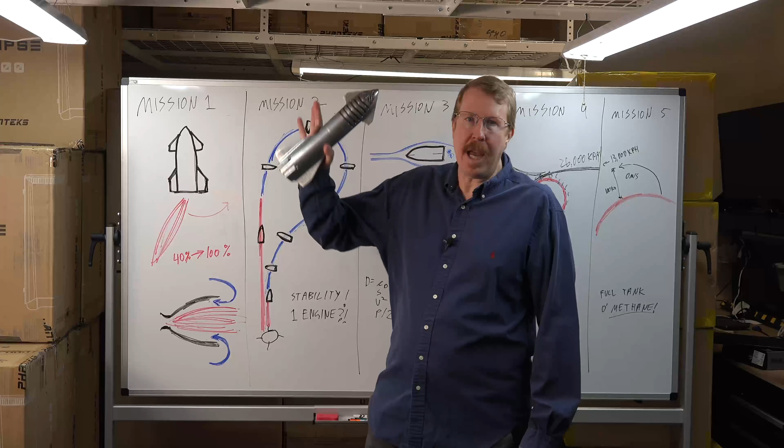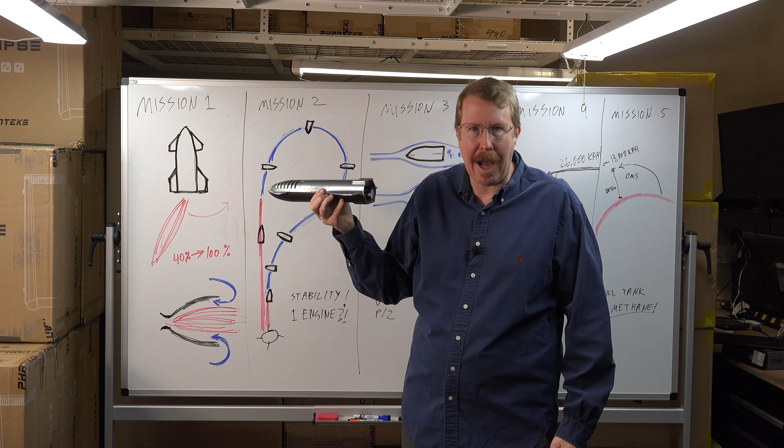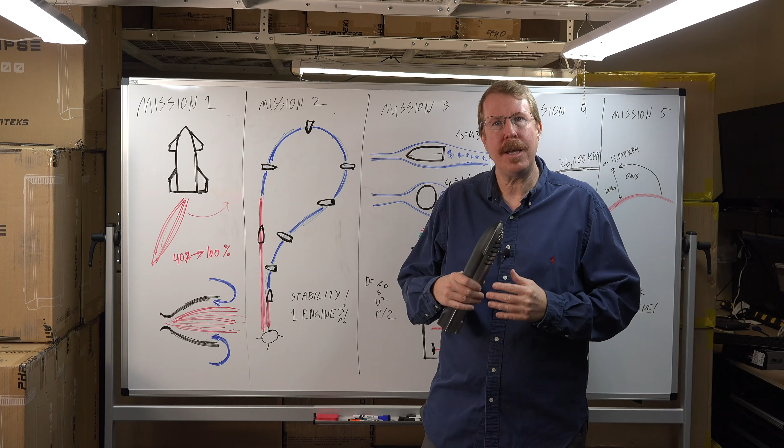So, like many of you, I recently heard about this insane flight that SpaceX was about to fly in Texas, where they would start off on a launch pad in a rocket with a bit of fuel, blast up to like 50,000 feet, fall down like a skydiver, and then hit landing engines at just the last moment and land. As soon as I heard about this, I was like, I have got to try this in X-Plane. Because remember what X-Plane is for - it applies actual aeronautical formula to physical bodies to predict what they're going to do next in the atmosphere. It's a completely objective analysis of what an airplane is going to do. And because of that, it lets you fly a mission in the sim before it's flown in reality. That's what X-Plane is built for, right?

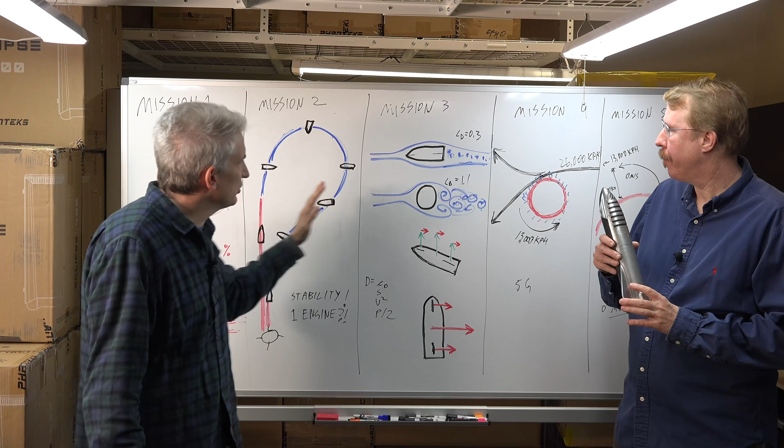Hold on, Austin. I have to interrupt here. So I have used this app, and it occurs to me that what you've done is you've taken going to Mars, which is a multi-step process. It's not like you just blast off, you fly to Mars, you land - it's a multi-step process. And you've divided it into 5 different missions, which ultimately, if you can fly all 5 of these missions, you could fly yourself to Mars. Now, we know the computers are going to control a lot of this, but what's the fun in that, right? It's fun if you get to do it. Of course. But you've taken the aerospace engineering and put it in, and you've essentially proven that what Elon is trying to do with SpaceX is doable.

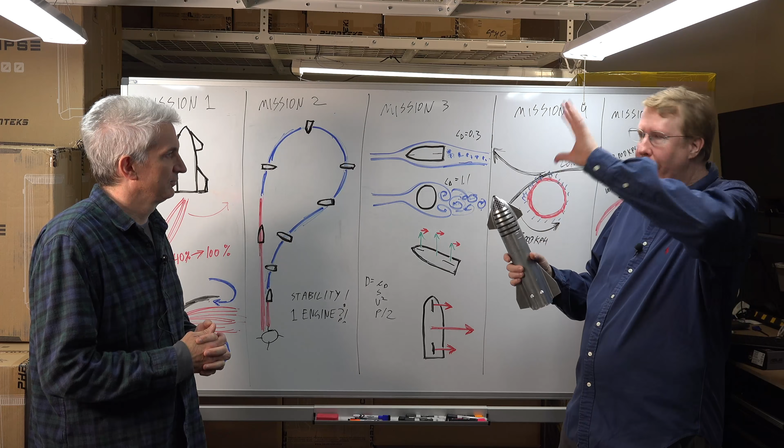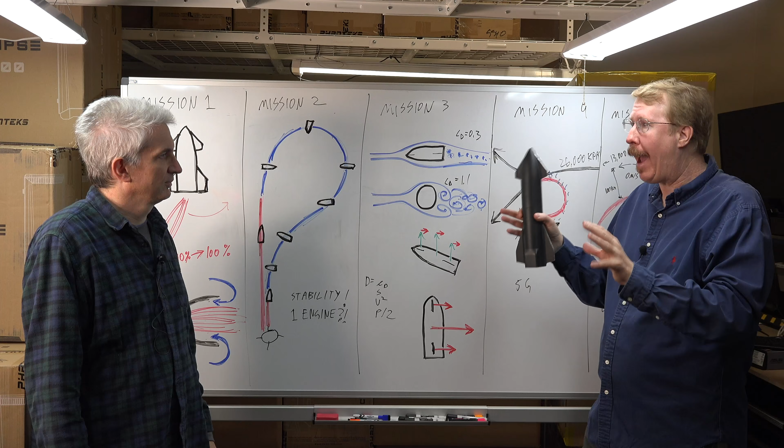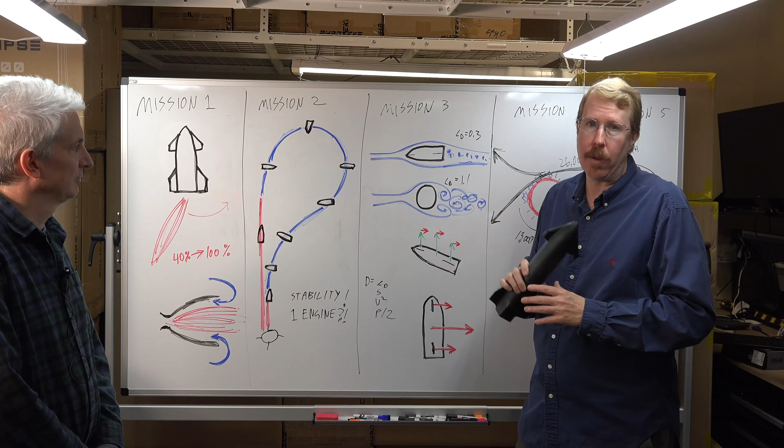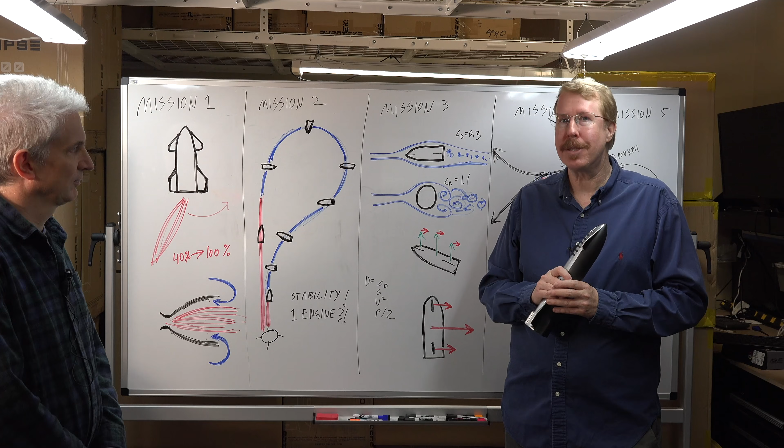So what I want to talk about today is an app I wrote called X-Plane Starship. It's available on the iPad, and it's going to let you fly all of these SpaceX missions yourself. By the time you've flown all 5 missions, you'll have a pretty good idea of what it's like to operate a SpaceX Starship. And if you can succeed in each of these missions using the real physics that X-Plane has, you'll have also proven whether the real mission to Mars that SpaceX is proposing is at least theoretically possible. Because a lot of this, from here forward, is just an idea - this is the only part that's been done. We've only flown, SpaceX has only actually flown mission number 1. All the other missions exist only hypothetically. And as we're recording this video, they're still fueling up the rockets and testing the engines for mission number 2. But you can fly it right now, before they do it, right now in the simulator.

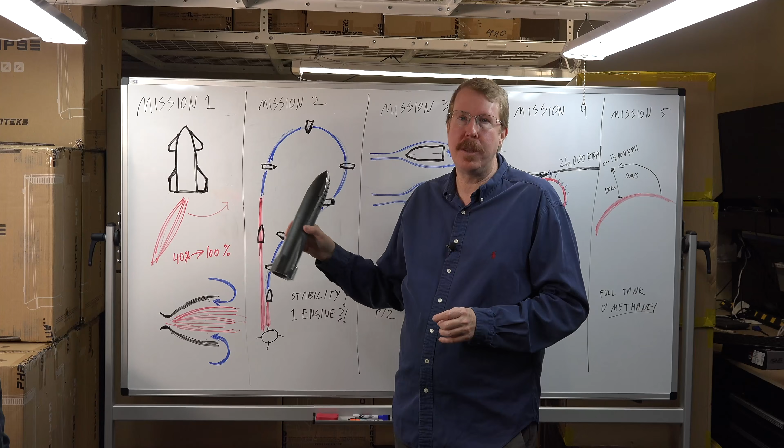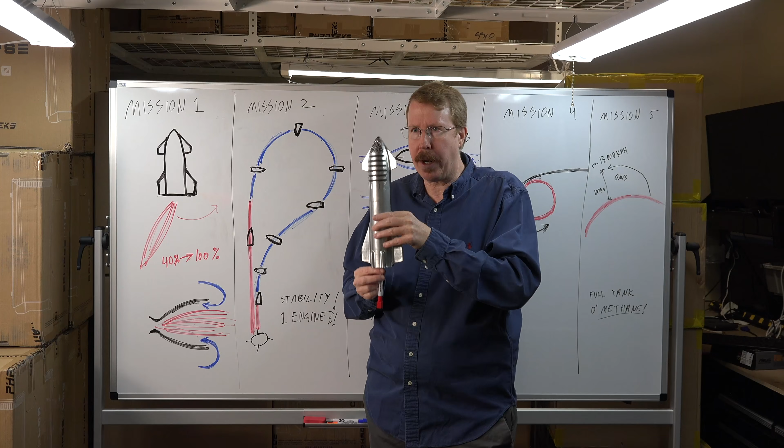So it's called X-Plane Starship. It's on the App Store, iOS App Store. It's free. And I guess what we're going to do is I'm going to walk you through each mission one at a time, and we're going to start with mission number 1. This is a recreation of a flight that SpaceX has already actually flown in this airplane. And the way it worked is they took off from a takeoff pad, translated over a bit, and then landed. How does this airplane steer itself when it's got the main engines running and hover? Well, the engine is mounted on a gimbal, and it vectors the thrust. So the gimbal vectors the thrust to move the airplane like this.

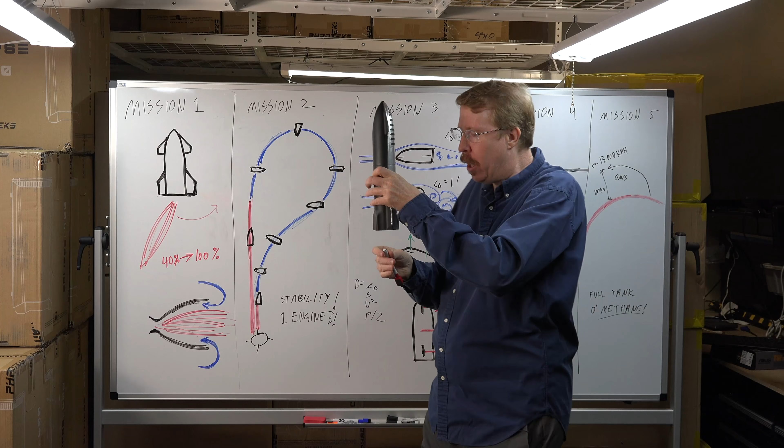It's not exactly like a seal balancing a broom on its nose, but it's kind of similar in that the thrust moves one way and the rocket initially moves the opposite way before taking off. So when you're flying mission number 1, as you tilt the iPad to tilt the rocket away from you, back towards you, or left or right, you're driving that thrust vector to maneuver the rocket.

So Mike, you flew this mission. How did you do with it? I did okay. It took me a couple of tries to get it right, and I kind of went around in a circle a couple of times. Yeah, the hard part is anticipating in advance enough to not find yourself always chasing around in a circle. No question, that's the hard part. That's exactly what I did.

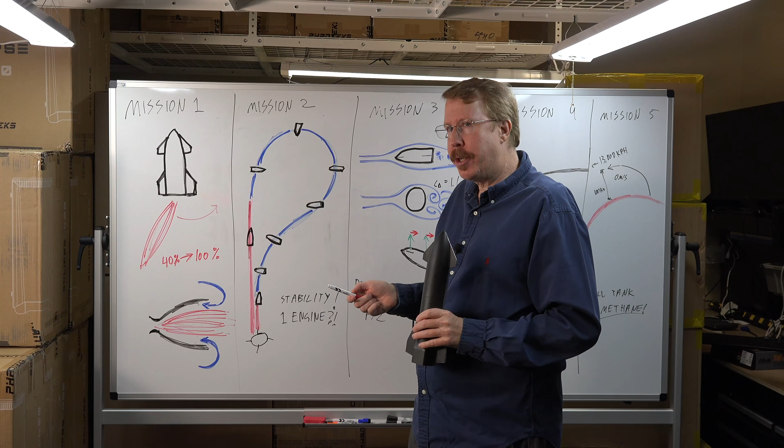Okay, so did you notice how many engines were running for this test? Looked like one to me. Yeah, exactly. There's 3 sea level engines and 3 vacuum engines in this rocket. It's a 6-engine rocket, but it only hovers with 1 engine. Do you know why that is?

Well, the obvious answer is because that's all it needs. Sure, but there's a more technical answer, I'm sure. Yeah, and here it is: the engines on this thing can only be throttled between 40% and 100%.

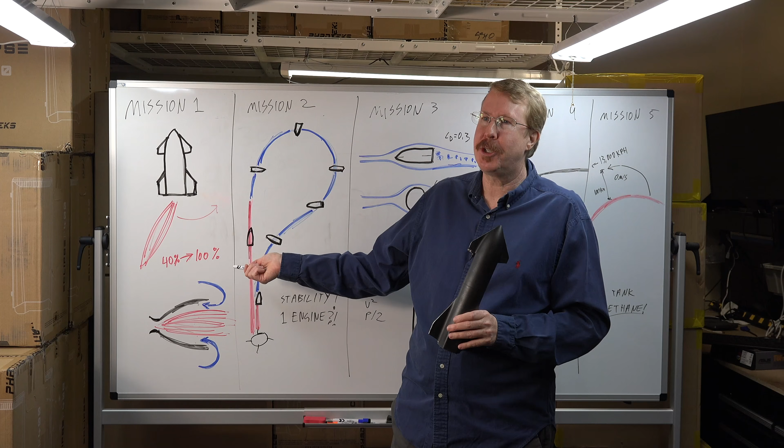Now, you obviously drive your ridiculous Dodge Demon Hellcat Viper. What is your car called again? Hellcat Red Eye. And what would happen with your Hellcat Red Eye if every time you put that thing into gear, you had to be between 40% and 100% throttle? How would that go for you? I wouldn't last very long. No, you wouldn't last through your first drive.

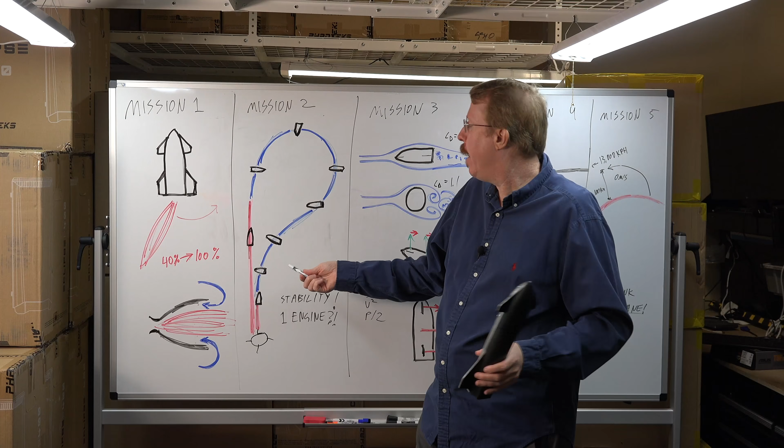These rocket engines are kind of the same. They run 500,000 pounds of thrust, and they can only throttle between 40 and 100%. So if you put too many engines on this thing, it ain't going to hover, because 40% is your minimum throttle — up you'll go. So this thing hovers with only 1 out of 3 engines running.

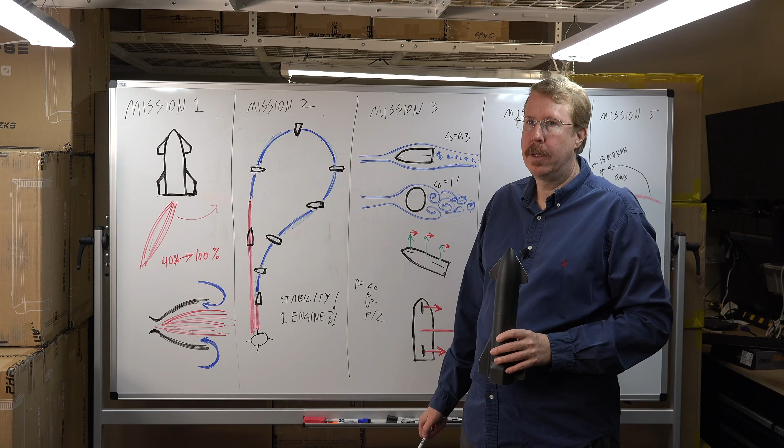Now, let's talk about why. Do you remember why exactly you cannot go below 40% throttle? What happens? Well, from your previous takes, I happen to know that if you run it below 40%, air, sort of like those blue arrows, gets into the nozzle and causes it to be ineffective.

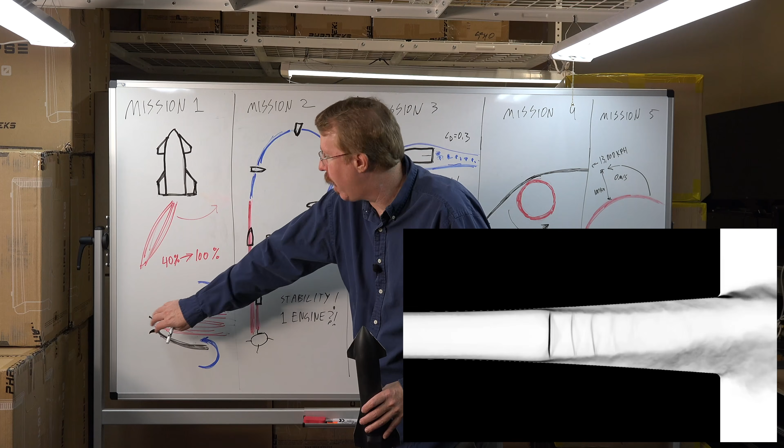Right, exactly. So what happens is the way flow works in a nozzle is it's supersonic. As the nozzle expands out, the air goes faster and goes to lower pressure. If pressure comes down too much, air from the atmosphere starts leaking in and destabilizing the flow around the exit. So you have to keep this nozzle filled with expanding fuel at a certain rate to keep that air from leaking in. 40% of maximum is the minimum you can dump into the system without air leaking in from behind.

So this thing hovers at 70% throttle, which is perfect to let you take off, translate over, and land on the destination pad. Okay, now let's talk mission number 2.

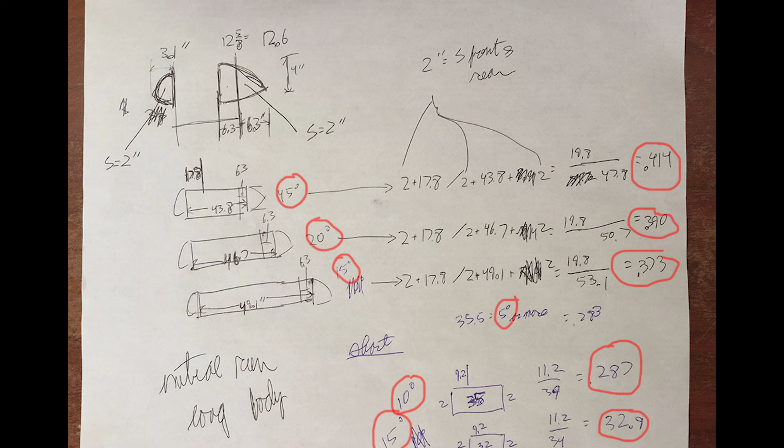So Mike, you remember like a year ago, I had a cylinder out of the roof of my wife's Tesla going down the street and measuring the aerodynamic center of the cylinder. Do you remember what I found about where the center of pressure lies on a cylinder?

Well, the center of pressure, I think, was in the middle of the thing. No. Wasn't in the middle? When you're running this way, going straight into the air, the center of pressure is 25% of the way back from the leading edge. And it caused it to spin around, which caused it to spin around.

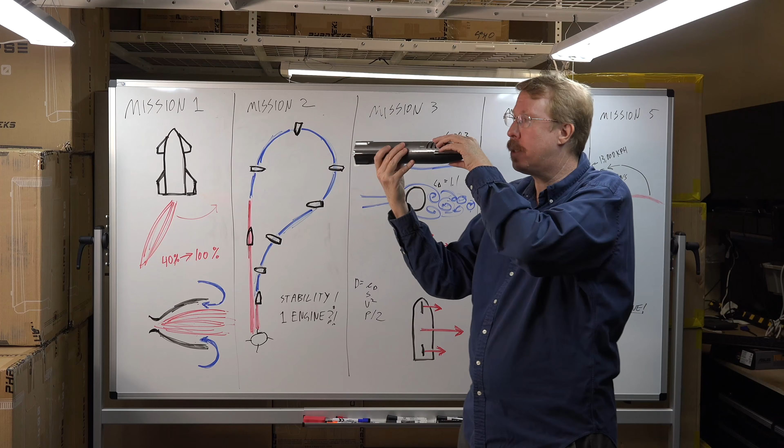So let's say we're going this way — the center of pressure is at 25% of the body length back, which causes it to spin like this. Now, as we're going this way with the center of gravity in the middle of the airplane, what happens next? Well, the center of pressure is now towards the back, and it's going to spin back around again, which is spin back around.

And then where is it going to wind up in equilibrium? Well, eventually sideways. Exactly, eventually sideways. So in other words, the center of pressure is always at roughly 25% of the body length, which will spin the nose back — it has the center of pressure there, which wants to spin it back, and it eventually just winds up at a 90-degree angle.

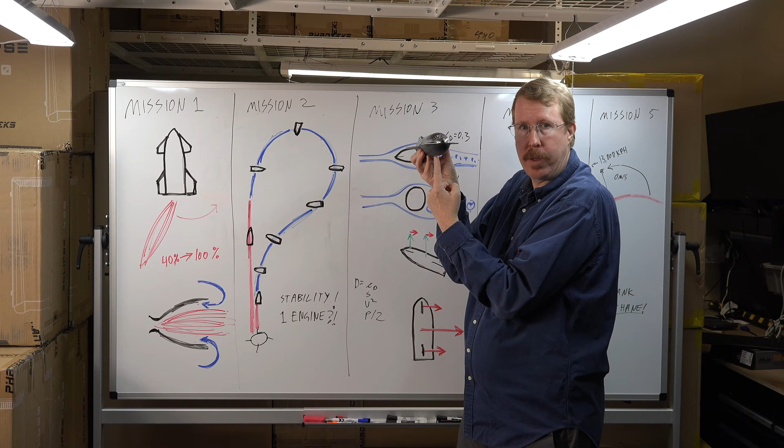If the center of gravity is at the center of the vehicle, or the test flight where it's connected to a spinning rod, it's going to wind up stable at a 90-degree angle. Because that's where the center of pressure and the center of gravity are the same point. So it's going to wind up wanting to move through the air like this.

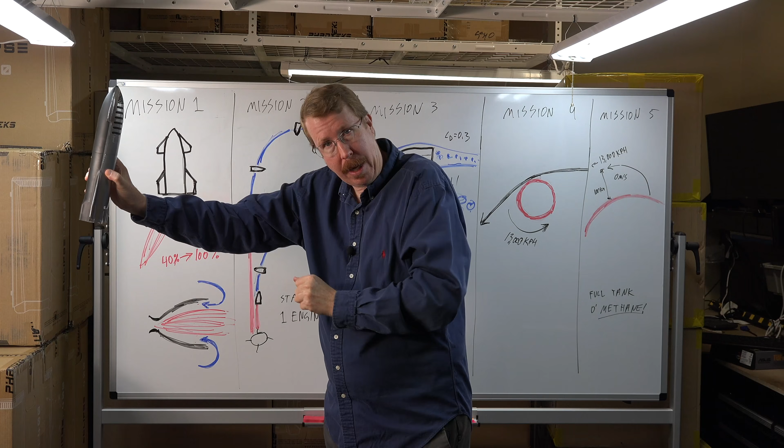Now, if we put some little fins on here with a 45-degree dihedral coming up like this, it's going to want to wind up in this attitude as it moves, because it's acting like a shuttlecock. You know how a badminton shuttlecock always wants to have the fins trailing behind it? Same thing here with a 45-degree dihedral. So this is the natural attitude the vehicle wants to take if it's going in this direction.

Now, let's talk about mission number 2, the crazy test flight that's about to happen in Texas. We start off on the pad, engage the engines, and up we go.

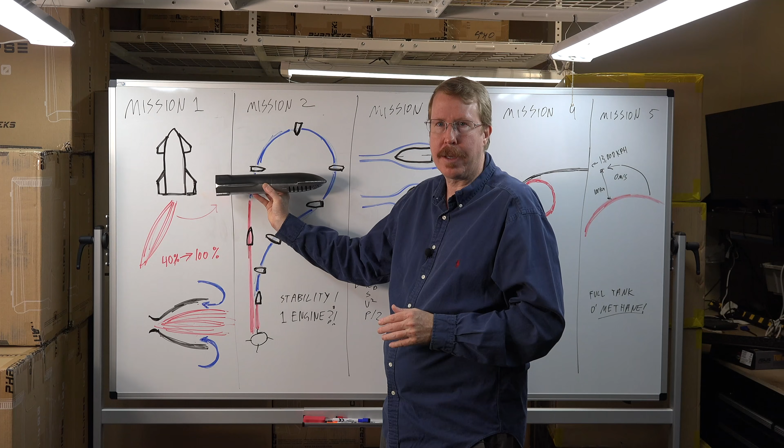Now, here's my first question for you. Why doesn't it put its belly to the airflow immediately and go to a 90-degree angle of attack during the launch? Well, I would assume the computers on board are ensuring it stays straight by using vector thrust. Exactly. So as you're going up, that thrust is constantly making tiny corrections you can't even see to hold the nose pointed straight up, because it's not naturally what the rocket wants to do.

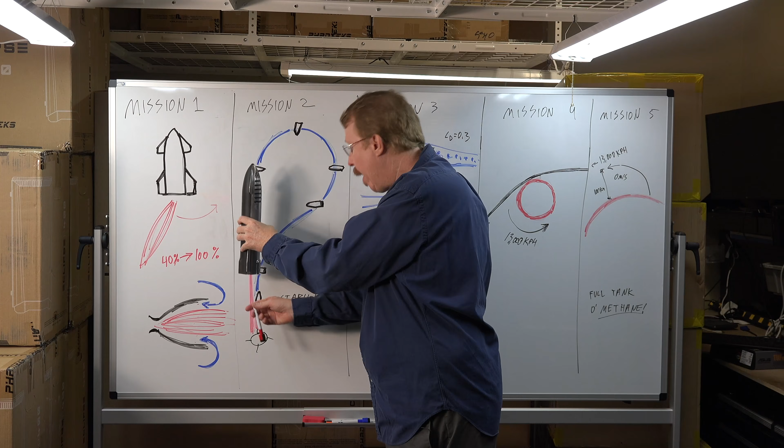Then, when the rocket engines shut down and the thing is still moving upwards, what's the rocket going to do next? Well, it's going to start to take a natural tendency to roll over. Exactly. It's going to go belly up like this because it wants to go belly into the air naturally.

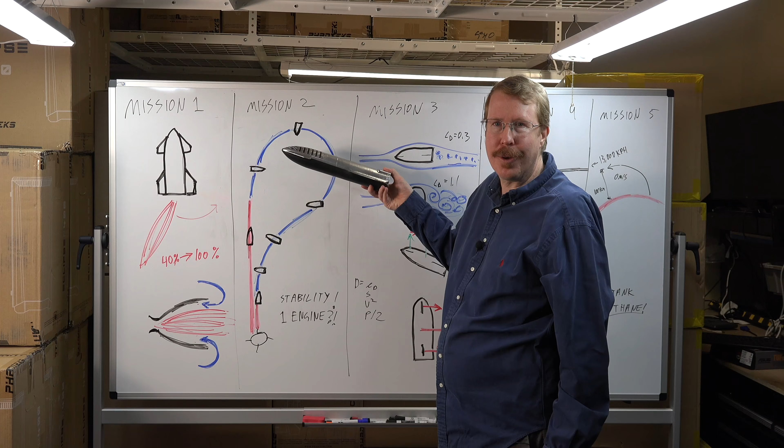Once that happens, it's going to peak out around 40 or 50,000 feet, and it's going to start to come down, and it's going to naturally want to assume the attitude of a skydiver. And at some point, you're going to start descending in a level attitude, and you're going to realize what you need to do is get back over to your landing pad.

If you want to lower the nose, fold up the wings in front, and the nose will come down. If you want to lower the tail, fold up the wings in back, the tail will come down. Same for roll and for yaw. You can always just move your wings in one direction or another to maneuver the craft. And at this point, you're not in a rocket so much as an airplane. You can actually glide like this back towards your launch pad like an airplane.

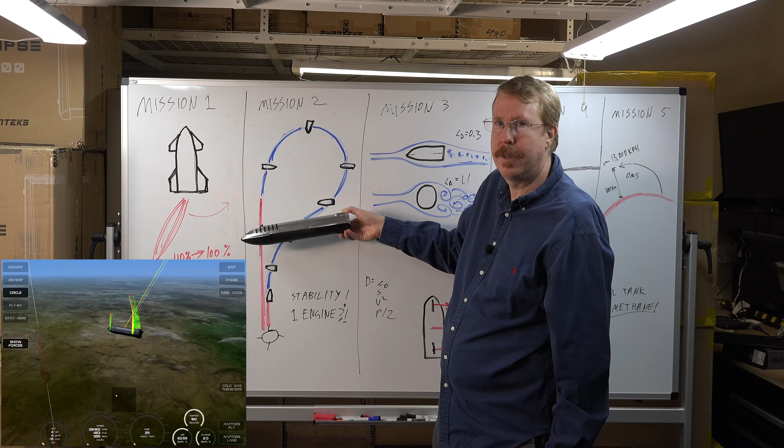And then what should you do as you start getting close to your takeoff point? Well, you want to raise the nose. Right, exactly. And pull back so you can almost try to stall yourself, essentially. Yeah, it'll feel like a stall in an airplane. Tilt the pad back towards you, raise that nose. Actually, you are going to stall the wings. I mean, you're going to a 90 degree, you are stalled. Yeah. So get the thing stalled, and then it's going to come down vertically.

And then when you're just above the ground, what do you do? Engage your landing engine. Engage the landing raptors. And there we go, and it'll tail sit.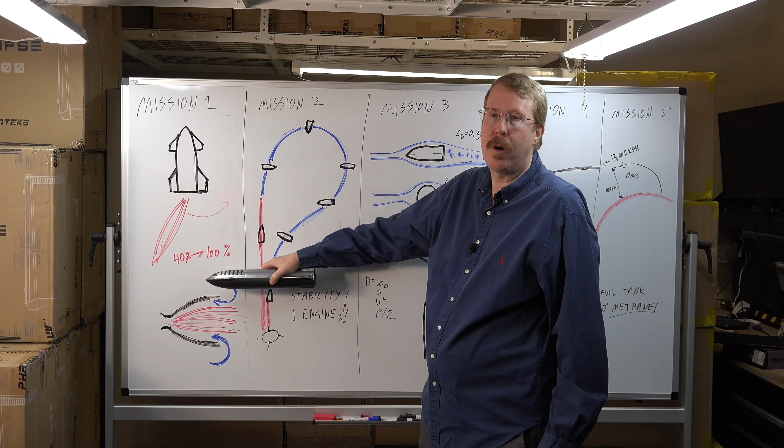Now, why do we let it get as low and slow as we possibly can before we engage those landing raptors? Well, the air is thicker lower. Also, the lower it is, the less the engines have to run. And the slower you're going, the less the engines have to run. Right, the goal is to have the engines run as little as possible for the landing, to use the smallest possible amount of fuel. Therefore, you want to go as low and slow as you can with air.

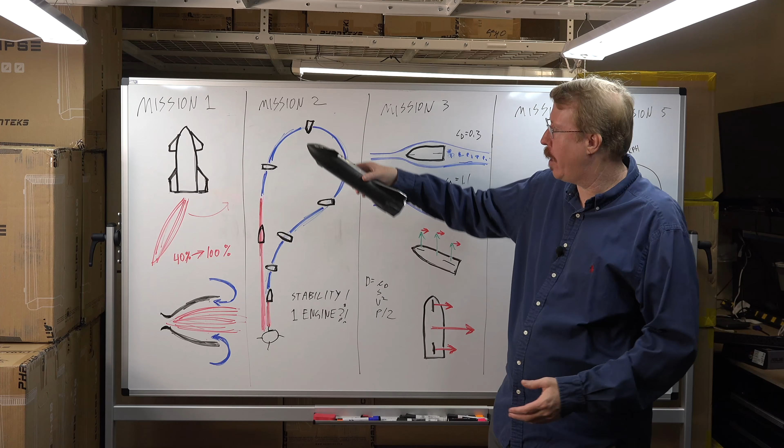The way to go as low and slow as you can with air is to maximize the drag and descend to the lowest possible altitude. And so that's exactly what it does. It's the equivalent of a skydiver waiting to the last minute to throw his chute. Right, because let's say he wanted to use his parachute for the smallest possible amount of time. Right, we want to run the engines on this for the smallest possible amount of time.

Parachute's only good for 30 seconds. Yeah, if you've only got 30 seconds of parachute, you have to wait until the last second to pull the cord. That's exactly it. Imagine your parachute only works for 30 seconds.

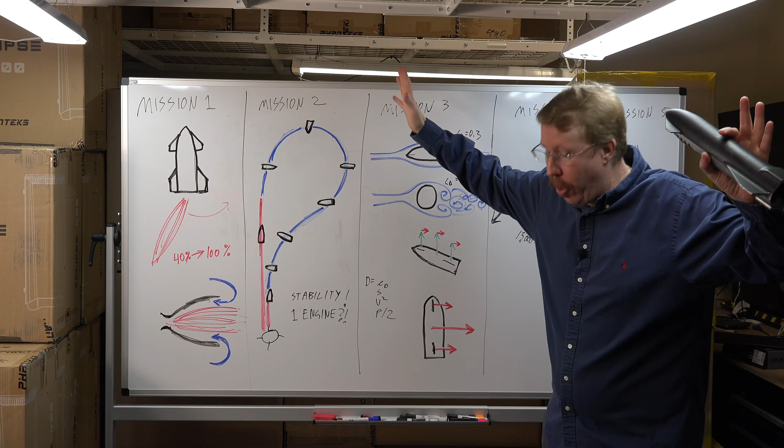You wait until you're low. And if you're smart, you're going to slow yourself down as much as you can with your arms and legs, to get the thing as slow as possible if you've only got 30 seconds of parachute use. That's exactly what it is.

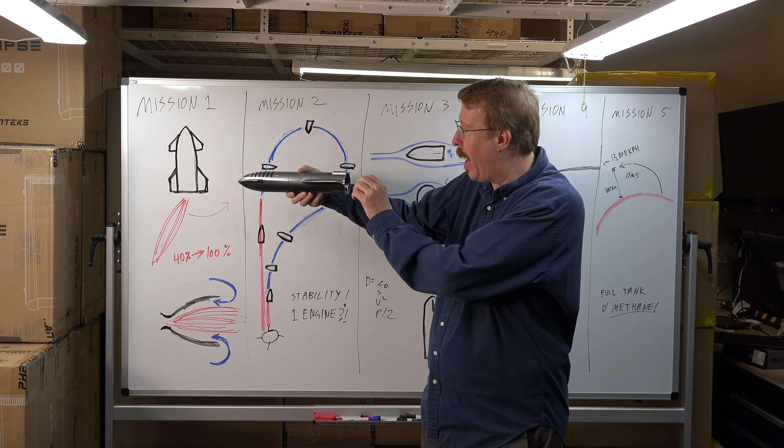Now, there's tons of renderings all over the internet about this. Yes, renderings, not simulations — I did a flight simulation, other people do renderings. All the renderings that show this happening show it landing by firing up all 3 engines and tail-sitting with all 3 engines running. But as we found in mission 1, this thing bears its own weight with 1 engine at 70% throttle, which is right in the middle of the throttleable range. So my bet is that in reality, they're going to land with 1 engine, even though all the renderings show it landing with 3 engines.

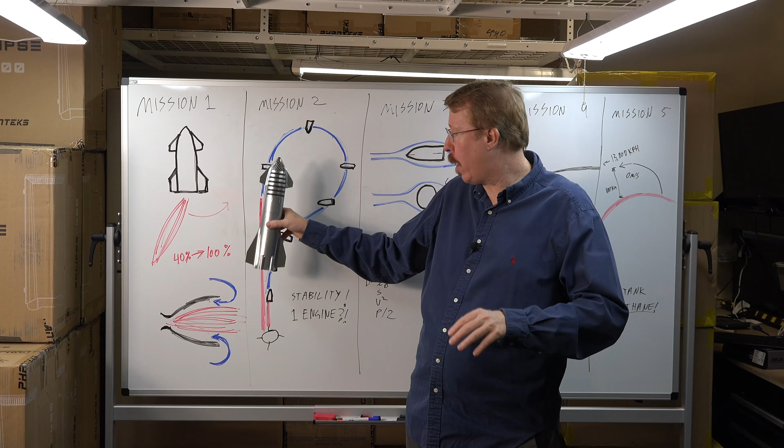Because 1 engine is what lets you establish a nice, good, single engine, 70% throttle, which is just right to settle this thing down at 1G. Do you want to take me up on the bet, by the way? I think you're going to be close, but I think there'll be some variation of that. It probably is the most efficient way, but it's also maybe sort of difficult, because if you're coming down too fast, that 1 engine isn't enough, and you end up putting your butt into the ground too fast.

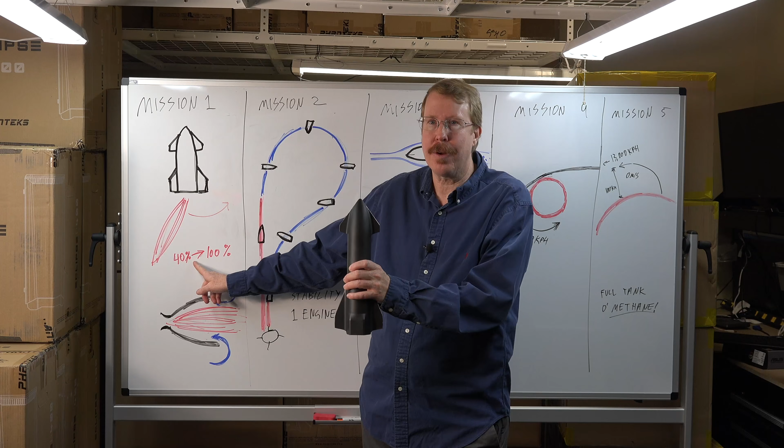Exactly, so that's the trick. If you've only got 1 engine running and you wait too late to engage it, you're still going to have a high vertical speed when you plant your butt into the ground. And that 1 engine, even at 100% throttle, won't be able to stop you. You have to engage that engine in time, because you're going to be running that engine around 70% to hover — you've only got 30% more for deceleration. So you need to engage it soon enough that 1 engine gets you stopped.

So that's mission number 2. SpaceX is going to fly it for real. You can fly it now on your iPad.

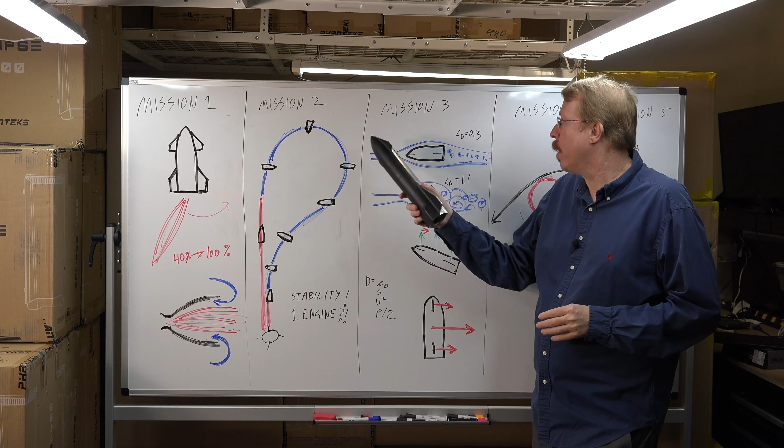All right, now let's go to mission number 3. This is where we're going to go to Mars. Let's back up for just a second, Mike — why are we doing this thing in Texas? Why are we trying to see how much we can slow this thing down in the air? Well, one would have to assume that this is going to occur on Mars in some capacity, and so they can take the math from Earth and run it through an equation for Mars gravity and Mars air density and figure out how it will behave on Mars.

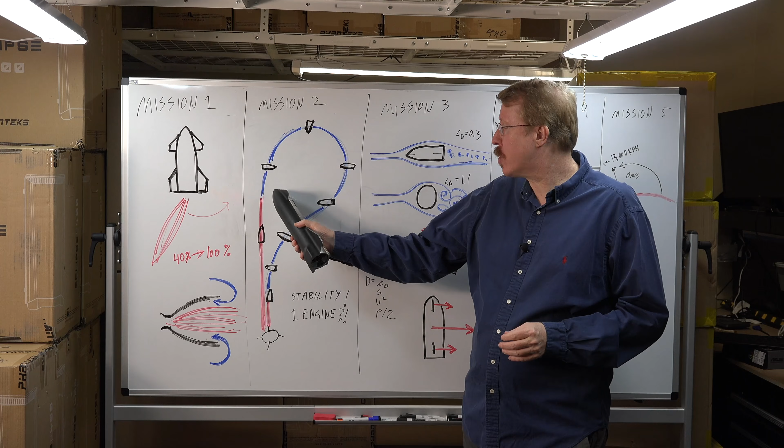Exactly, this is a dress rehearsal with different gravity and air density than what we're going to see on Mars. When this thing lands on Mars, as you can do in mission number 3, the goal is to get the rocket as low and slow as possible using air, so that you're as close to the surface and as close to stop as possible, with just a minimum amount of deceleration and landing that you do with fuel. That's to let you have the minimum duration possible landing burn and use the minimum possible amount of fuel for landing, if you slow it down as much as possible first with air.

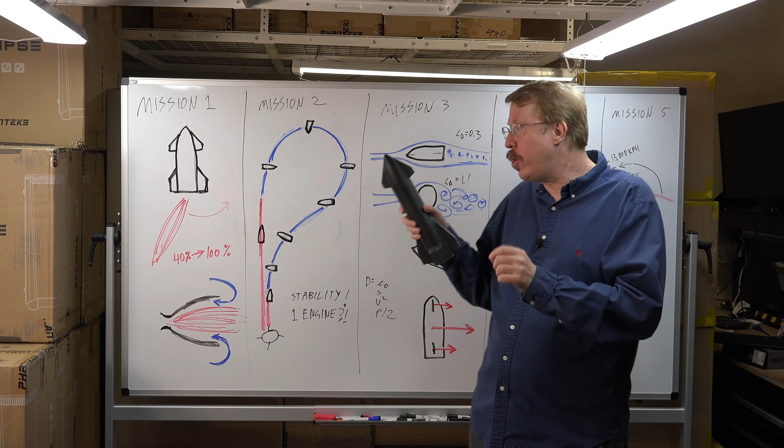So some people are arguing on the internet — they're saying, oh no, it's going to slow down with air, and other people say, oh no, it's going to slow down with rockets. Well, it's obviously going to do both. The only question is how much of each will there be? And the more you can slow down with air, the less you have to slow down with fuel. You take the free deceleration over the fuel deceleration first.

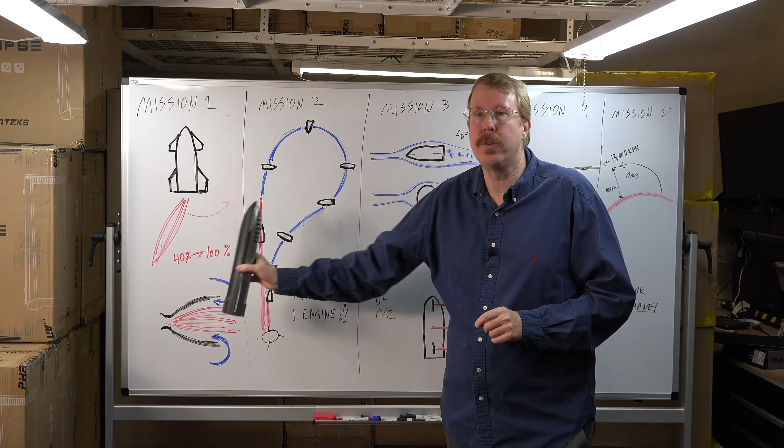Exactly, I'll slow down with air, which doesn't cost me any fuel. And SpaceX claims that they can dissipate 90% of their speed in the Martian atmosphere, which is 99% of the kinetic energy. As I've flown this in the sim, I found exactly the same answer — I can get rid of exactly 90% of my speed with air, which is 99% of my kinetic energy, leaving me only to lose the last 10% of my speed, or 1% of my kinetic energy, with fuel for the landing.

So when you fly mission number 3, I'm going to start you off in the atmosphere. And if you were to lower the nose like this, you'd have almost no drag — you would have a drag coefficient of 0.3.

But if you can go to it at a 90-degree angle to the flow, which from a cross-section standpoint looks like this, your rocket will have a coefficient of drag of 1.1, which is 4 times the drag coefficient. And as you may remember from previous takes on this video, it's not just the drag coefficient, it's also how much your frontal area is.

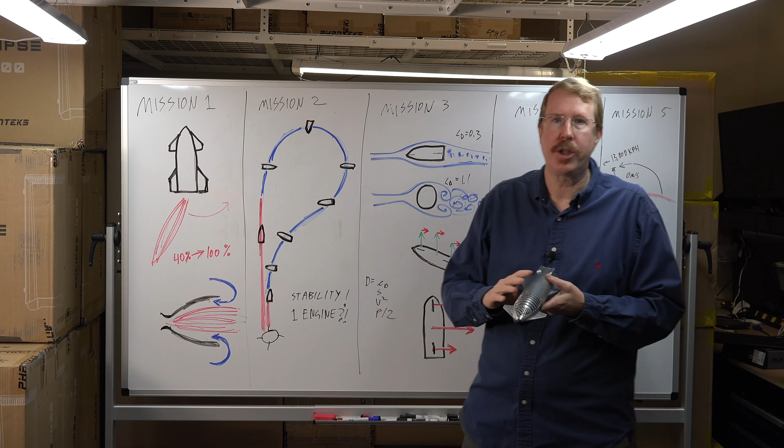Like this example, this is what the air sees. What I'm showing to the camera right now is what the air sees. There's almost no rocket when it's coming straight at you, very little frontal area. But now there's a lot of frontal area when I'm coming at you sideways.

So when the rocket is doing this instead of this, not only is it a higher drag coefficient, 1.1 instead of 0.3, but it's also maybe 8 times the area exposed. So from a ratio standpoint, you've got 4 times the drag coefficient and 8 times the area, so you multiply those for a total of 32 times the amount of drag.

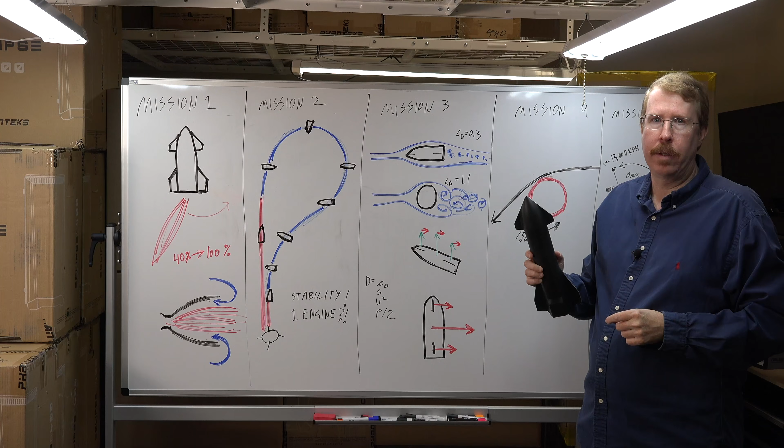Exactly. You can see the equation right here, and even though you figured that out on your own, the drag coefficient was figured out by other people many years ago. Drag equals coefficient of drag times the frontal area times the airspeed squared times air density, divided by 2. This is the formula for drag. So as you figured out, not only do you have 4 times the drag coefficient when you go through the air sideways, but you have maybe 8 times the area, or 5 times the area. You multiply those two to get the total drag increase.

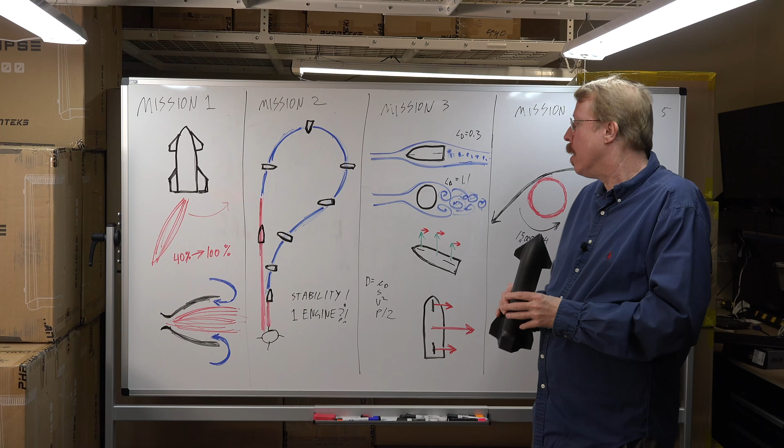So when you're on Mars, you can, if you want, lower the nose a bit like this, so you get lift and some drag, and this will let you cruise along on Mars at a low altitude and low speed. Or you can pop it up like this, again steering with the iPad, in which case you don't have any lift, but you get a lot more drag. You might ask, do I want lift or drag? Well, you want drag to slow down, but you might want lift to keep you from hitting the ground, to give you more time to slow down.

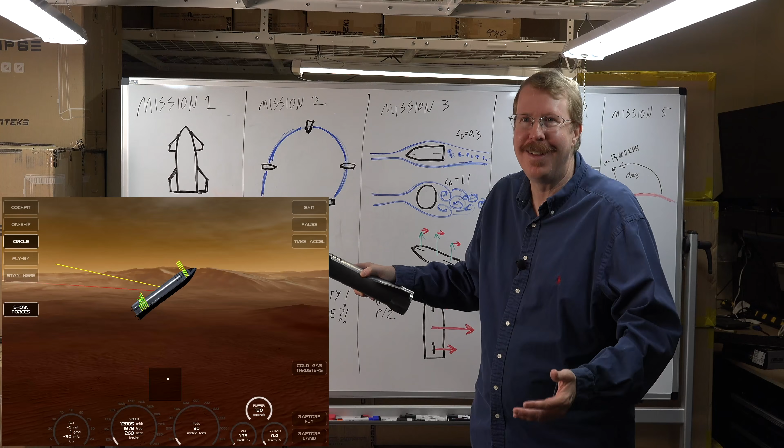So it's up to you to play with it to see how low and slow you can get before you're about to hit the dirt. I can get it down to less than 2,000 kilometers per hour. And the number you start with, which I haven't mentioned, is maybe 13,000 kilometers per hour.

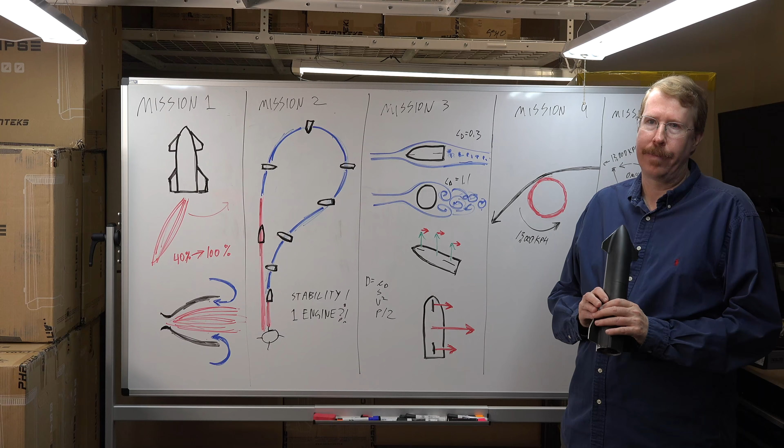So on mission 3, I start you at a pretty low speed and altitude, so you can just get that nose up, get it slowed down, and see how it handles. But in reality, when this thing enters the atmosphere, it's a way higher number than that, which takes us to mission number 4. That's a good segue—yep, so we've segued to mission number 4.

Orbital speed around Mars is 13,000 kilometers per hour. If you go that fast, your centrifugal acceleration pulls you out as much as gravity pulls you in, and you stay in a perfectly circular orbit. Now...

As the aircraft is coming at Mars from Earth, the speed is going to be, unfortunately for us, 26,000 kilometers per hour—that's twice orbital speed. This is how fast this rocket will approach Mars. You have no choice in that, because the gravity of Mars is going to pull us to Mars that quick whether you like it or not. It's going to be building up to 26,000 kilometers per hour over the course of 6 months, as Mars tugs on it with its gravity. This is how fast we're going when we hit Mars. Doesn't matter whether we like it or not—gravity says so.

And when we get to this planet going 26,000 kilometers per hour, if we don't do anything about it, the gravity of Mars will bend our flight path around ever so slightly, and then we'll head off in a new direction, in a vector that gets infinitely close to a straight line over an infinite period of time. This shape is called a hyperbola.

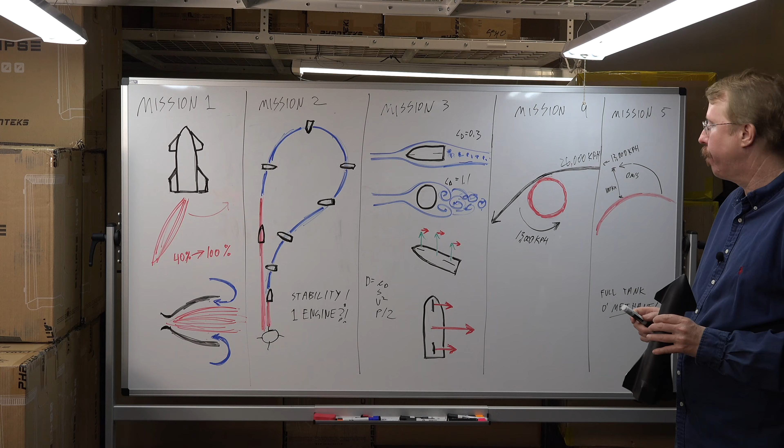What's interesting about this hyperbola is our flight path will be bent onto a new trajectory that goes out into deep space forever. It's not an elliptical orbit, it doesn't come back. If we don't find a way to shed 26,000 kilometers per hour, we're going into deep space forever, and the astronauts will become mummies at some point in deep space. So we have to find a way to get rid of this speed. We certainly need to get below 13,000 kilometers per hour if we want the mission to end on Mars. So how do we get rid of that speed?

With a little bit of atmosphere here around Mars, it's time for us to take what we've learned in mission 1 and 2. So mission 4, we've got to try to get to mission 3, and in mission 3, we've got to try to get to mission 2, and in mission 2, we've got to try to get to mission 1. That's it. Exactly.

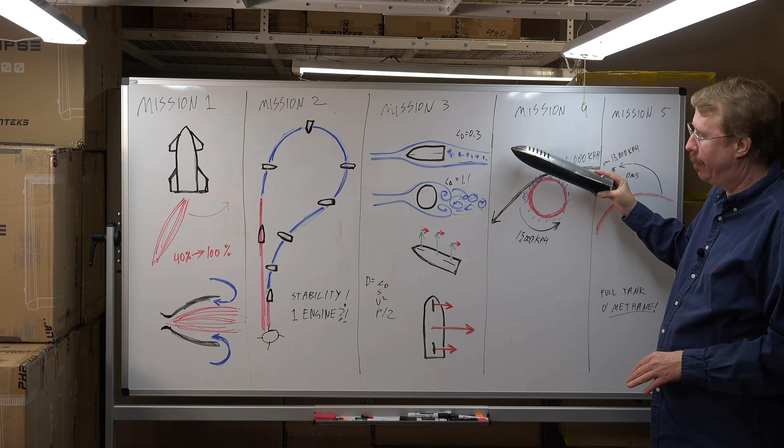So what you're going to want to do is, when you're coming into Mars at 26,000 kilometers per hour, let's say you don't want to have too much force on the airplane, you kind of want to lower the nose for this configuration. You don't want to have so much load on the plane, so you kind of bring it like this. What's going to happen? Well, you're liable to bounce off the atmosphere and continue on.

Exactly. The lift from the rocket will just pull you right up out of the atmosphere, and remember, there's no lift in space. You won't hit that lift until you hit the atmosphere, and suddenly you're like, whoa, I just got all this lift - and then off into space you go, in just a different hyperbolic vector.

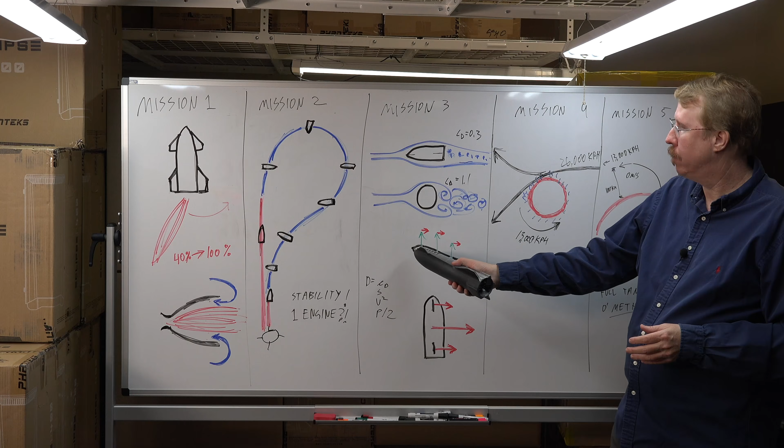What you need to do is maximize your drag and have no lift. So to do that, you get the vehicle at a 90-degree angle. Then once you get down to 3,000 kilometers per hour, you're in mission 3 basically. And you're winning if you're as low as possible at as low a speed as possible before you have to hit the landing Raptors button, because that's what's going to give you the minimum fuel burn and the minimum time spent under the rocket engines.

Okay, now here's a really interesting thing about mission number 4. Mike, have you ever seen when the astronauts come back from the International Space Station? Have you ever seen what kind of shape they're in when they come back? I haven't actually seen, but I can imagine that after being in 0G for a while, being all of a sudden in 1G has got to make you pretty wobbly.

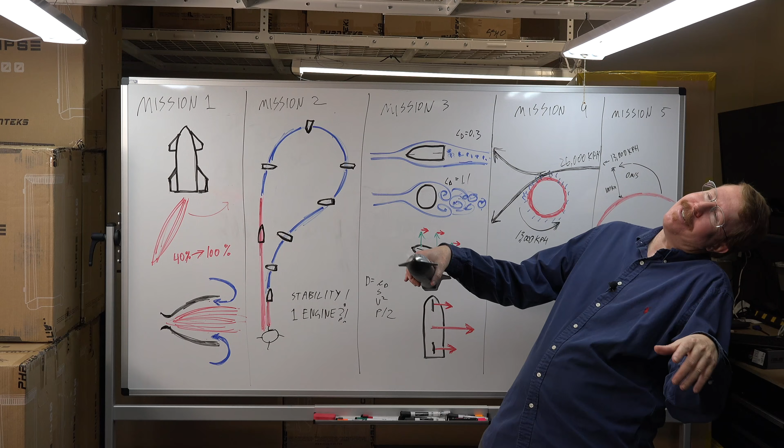Yeah, well they're kind of like this, like, oh it's great to be back on Earth, so nice to see Earth again. And they're being carried around, right? They've got this big huge smile on their face while they're being carried around like this on a La-Z-Boy chair. They can't stand up, they can't even think about it. Because once your body has been in space in 0G for all those months, coming back to 1G on Earth, it feels like you can't even move anymore. So going from 0 to 1G after a couple of months is pretty traumatic.

Traumatic and debilitating. All right, now let's talk about mission number 4. When you come into that atmosphere at 26,000 kilometers per hour and start slowing down with air, do you know how many G's you pull from that deceleration? Well, from a previous screw-up take of yours, I happen to know it's 5 G's. Exactly. So if 1G renders an astronaut useless, what is 5 G's going to do for an astronaut?

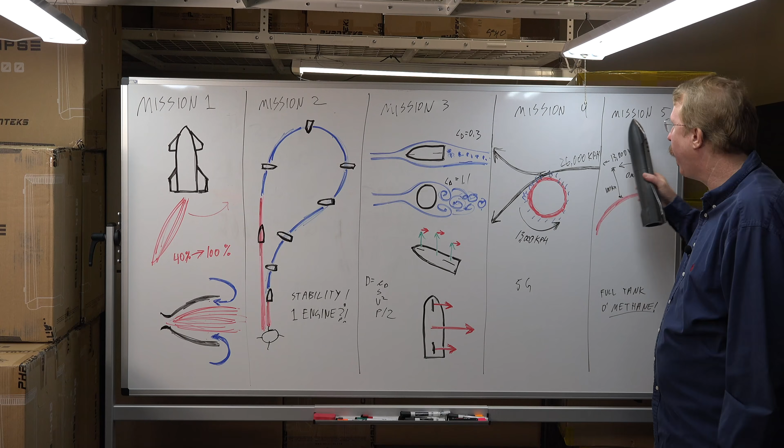Right, so in other words, when this Starship is coming from Earth, the astronauts will have been weightless for 6 or 7 months. Wow. They're going to go to 5 G's almost instantly for several minutes during this deceleration. During that time period, it is my bet that the astronauts will be not even close to being able to function in any capacity at all. And so after a 6-month trip, it's going to come down to this 5-minute deceleration in the atmosphere at 5 G's, and at that moment, no human can function.

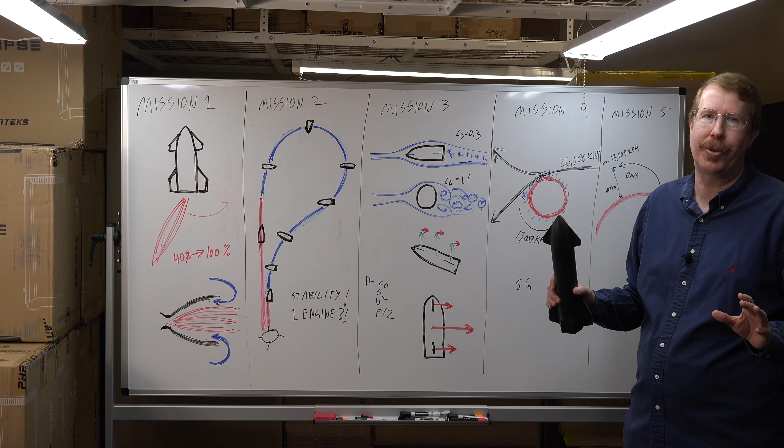It's going to be completely up to the computers to handle anything that happens, no matter what it is. There will be no human intervention during those several minutes. I mean, that's just mind-boggling - 0 G's for 6 months, and you suddenly go to 5 G's. Yeah.

How many times more G's is that? Infinity more. Infinity. That's 5 divided by 0, which we know is undefined.

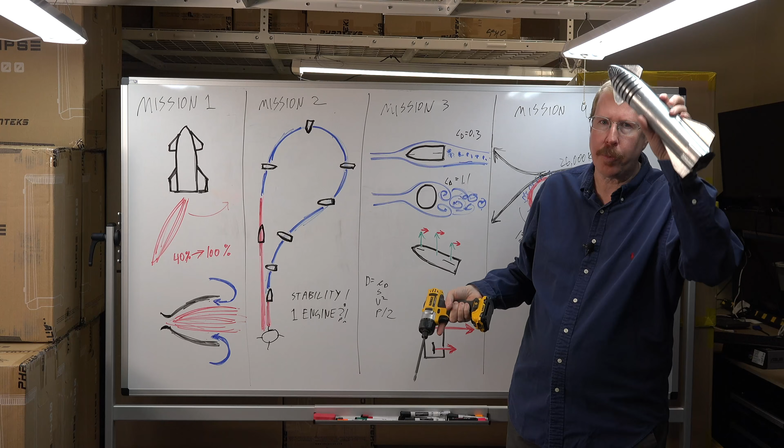Now let me point out something here. They're going to send multiple starships. Let me tell you my idea, which I haven't heard batted around in the media. What if, just pretend this is a starship - I've only got one 3D printed model, sorry - what if 2 of them went, and they hooked up to each other with a cable, and rotated around each other like this on a cable all the way to Mars? They could be under 1G for the entire trip, you see?

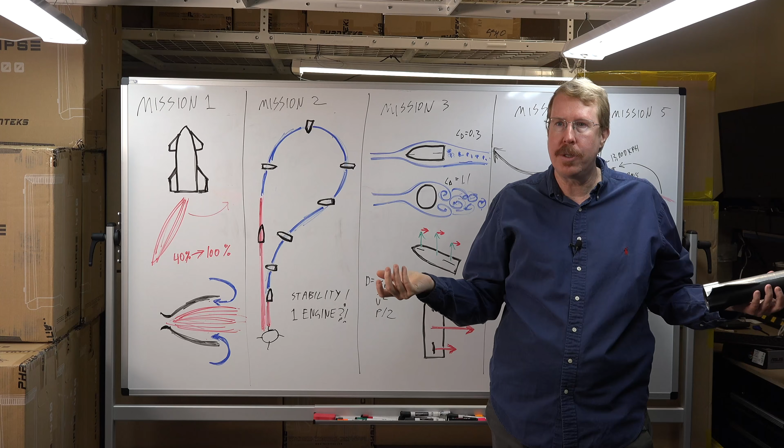Spin them around on a cable like this. The cost would be almost 0, right? Your cost would be a steel cable connecting one ship to another. There's no cost, there's no fuel. You probably want to send 2 starships anyway, so why not have a little cable connected and give them some spin? You can be under 1G of gravity for the entire trip. Doesn't cost you a dime, hardly.

That's what I think they should do, because then at least they arrive for this 5G re-entry with their bodies acclimated to at least 1G. That is a thought. Yeah, I hope they do it.

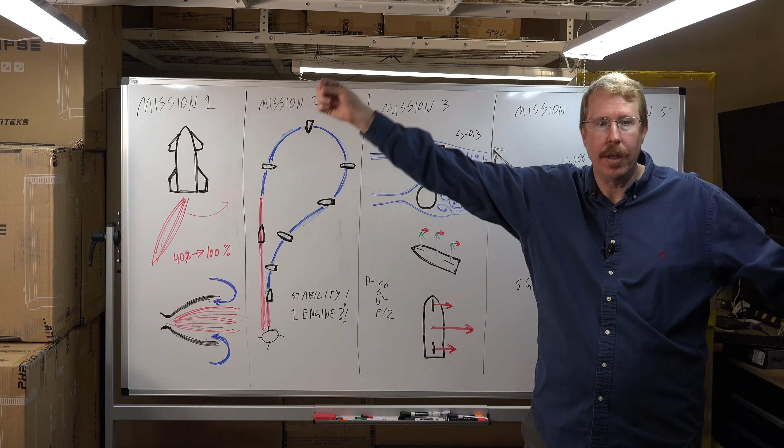You have to have a counterbalance. I mean, it wouldn't have to be another ship, but the only reason - well, then it would have to be, because you couldn't carry a counterbalance heavy enough. And you're going to send multiple ships anyway, so you might as well put them on tethers and let them orbit around each other on the way there at exactly 1G.

Easiest thing to do, I think. So that's what I would do, and hopefully they will do it. But I've never heard it mentioned in the media, for whatever reason. Yeah, because it would make the astronauts much more healthy when they get there - they wouldn't be so weak. Exactly, and that includes the re-entry, the Mars exploration, the return, and just all around human health and well-being.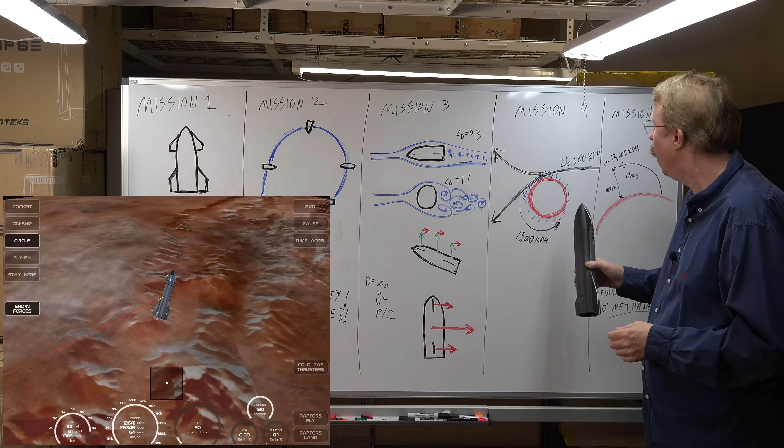And so this is mission number 4. One of the things that's impressed on me as I've flown it is that the word 'challenge' was dreamed up by someone sitting here on planet Earth, surrounded by air thick enough he could breathe, gravity, not being irradiated by radiation, not going through the atmosphere at 26,000 kilometers per hour. He could take another breath or walk across the room and live, as he invented the word challenge.

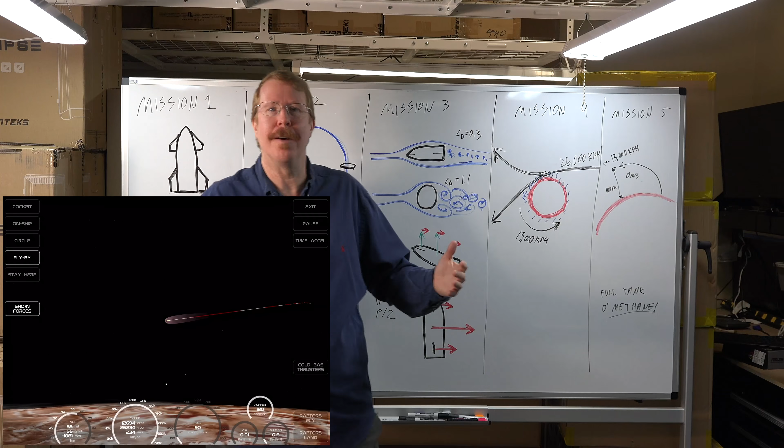None of those things apply on Mars. The challenge is simply like beyond anything humanity has ever faced. It's just a whole new level of challenge. And I've started to get a sense of that as I've flown mission number 4 in the simulator. And so that concludes mission number 4, where we'll use the last of our fuel for landing.

And now it's time to move on to mission number 5. Whoa, hold on. What? You said you just used the last of your fuel for landing. Mission 4, yeah, for landing. Okay, that sounds like a suicide mission. What? I know I'm not going to Mars if that's the parameters. How are you getting more fuel?

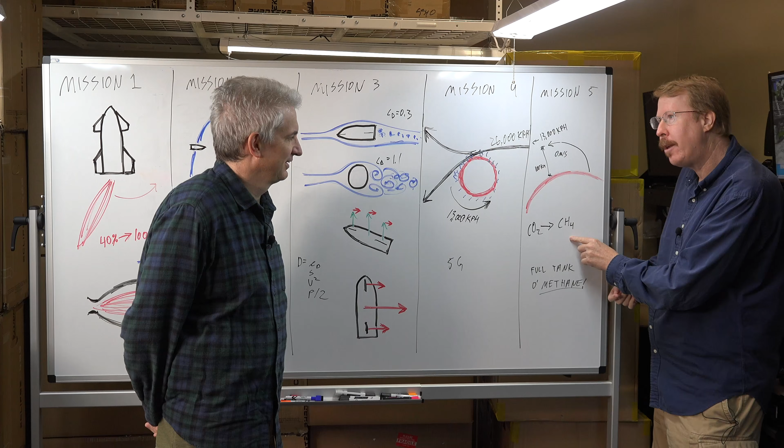Oh, it's easy. So here's the deal. Martian atmosphere is made up almost entirely of CO2, about 95%. And this ship is powered by methane engines, which is CH4. That's methane. So all we do is convert the CO2 to CH4 to refuel the ship from Martian atmosphere. Where do you get the hydrogen from? Is that magic? You have to bring that from Earth, apparently.

Either by bringing the hydrogen with you from Earth, or maybe you can extract it from water if you have a nuclear reactor or something like that. You can fuel up with CH4 on the planet Mars. Okay, and so you're going to have a full tank of methane for this mission. This is a chemical reaction that has been done and tried many times. Okay, got it, okay, all right.

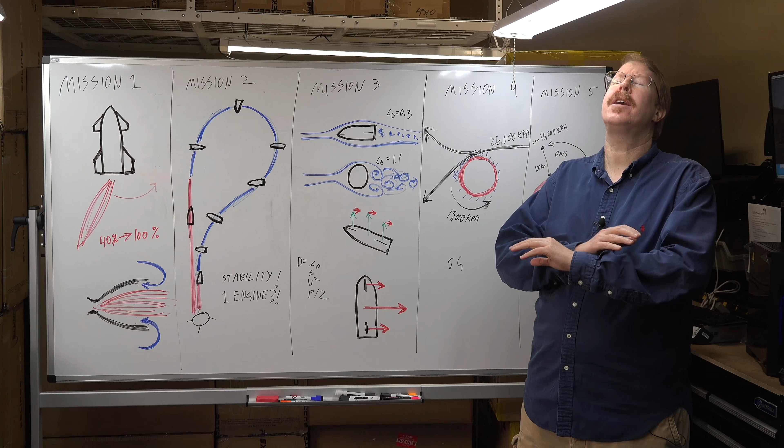So once you've got a full tank of methane, your goal is to take off and fly into orbit. Now this ship, when it's full of methane, is nothing like the ship you've flown in the previous missions. You haven't flown this thing with a full tank of gas yet. Now it's full of fuel, and the ship is just an absolute pig when it's completely full of liquid methane, and it is going to be so slow and heavy. It's basically, imagine the difference between a beer can that's empty and a beer can that's full.

Imagine the weight difference between those two things. Throw an empty beer can and see what happens, then throw a full beer can and see what happens. The inertia is just completely different. They're two completely different things.

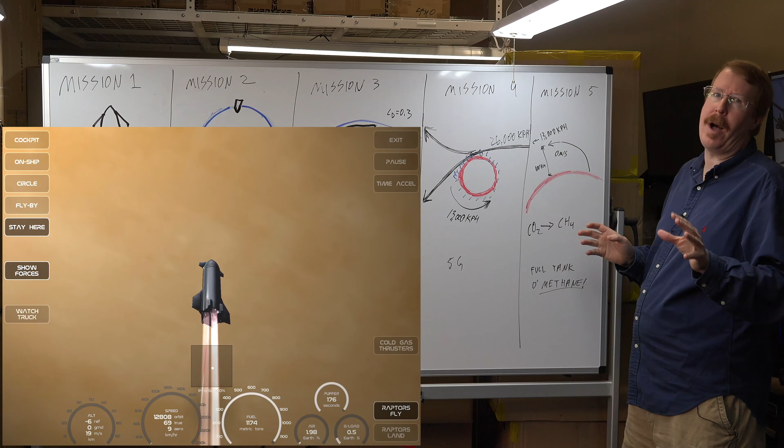And so this ship, now full of fuel, is going to be much heavier and more sluggish than anything you're used to. I hit the time acceleration button just to get that takeoff happening in a reasonable time period.

So, going ahead, blast off from Mars, and your mission is to make orbit. Mike, how do you make orbit? What do you think you do? Well, obviously you start out vertically, and then at some point you have to start to rotate horizontally. And you got to get up to 13,000 kilometers per hour.

And according to the little diagram, that's at 100 kilometers of altitude. You better have 0 meters per second vertical speed when you do it. No good if you're going up or down—you have to be going around, which is 0 meters per second vertical speed. Once you can do that, you can get the ship into orbit.

What you can do is turn on the little reaction control system, a little button on the right, point the nose off in some direction you want the ship to go, hit those rocket engines for just a few moments, and power off into a new orbit.

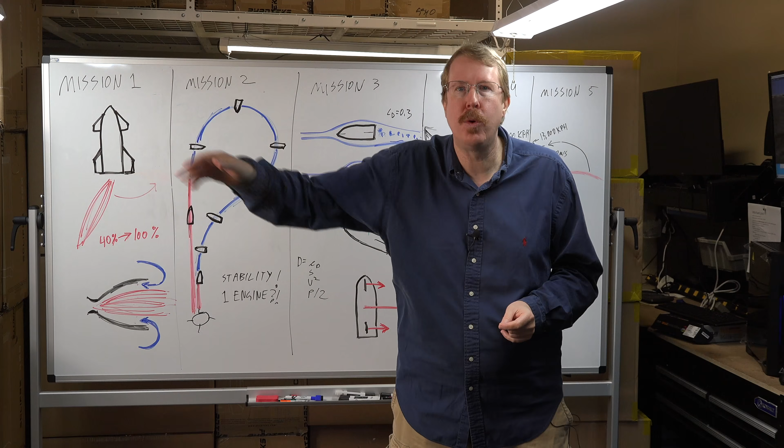Then, whenever you want, flip the tail around to point in the direction you're going, engage the landing Raptors to slow down, and repeat mission 4 to come land at some new place on Mars. So in other words, if you can handle the orbital mechanics, you have the ability to travel anywhere on Mars.

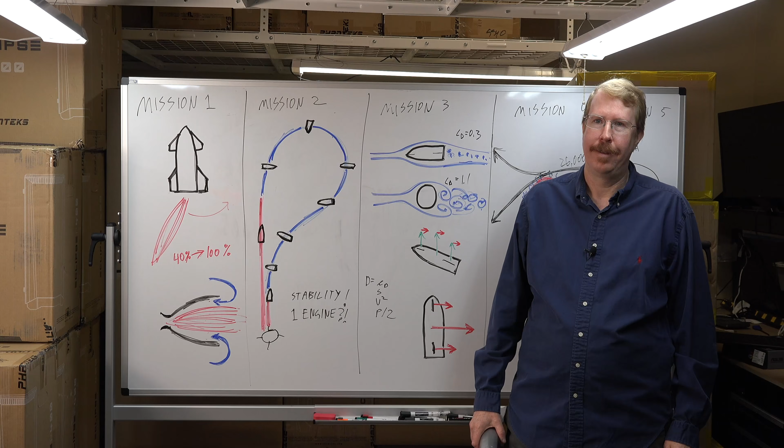Okay, Austin, I have a pretty obvious question here. There's not much of use on Mars. You've mentioned there's some methane, I know there's some red dirt there. Oh, red dirt, lots of red dirt. And it's very cold.

Let's just say there was tons of oil there—there'd be no way to bring the oil back to Earth, and we don't want to burn oil here anyway. It's a disaster. So why in the world do we want to go to Mars? What's the point? It's uninhabitable. It just doesn't make any sense to me. It seems like a big waste.

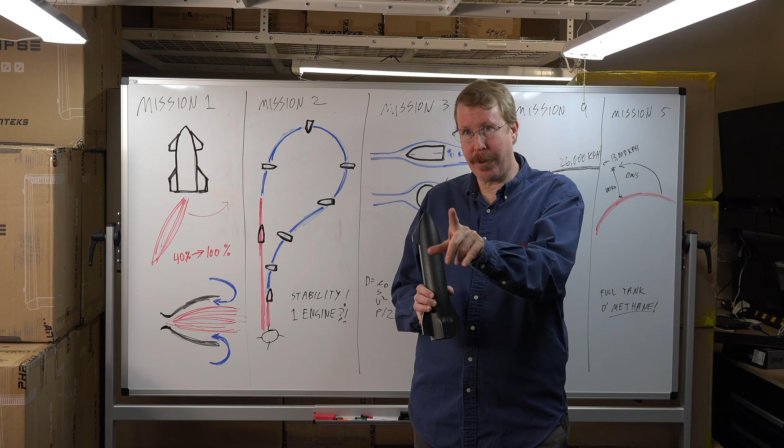Exactly. And so that, to me, is the fundamental question hiding behind all of this: why the heck would you do it? My answer is a little different from other people's answer on why we would do this. Here's my answer.

On Mars, it has 1% of the atmosphere that Earth does, and 40% of the gravity. That makes it so much easier to launch a rocket on Mars than from Earth that it's ridiculous. It's way easier to launch from Mars than from Earth.

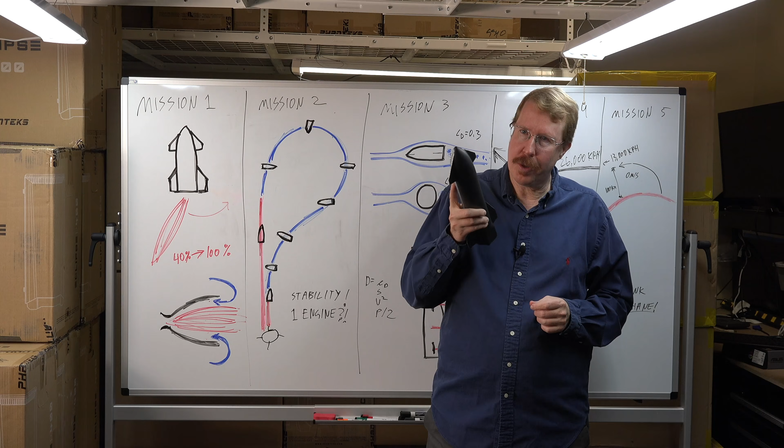Next, Mars is farther from the sun than Earth is. So if you want to take a trip to Alpha Centauri, the nearest star—an undertaking that makes the trip to Mars look like nothing—by starting from Mars, you're escaping less gravity on the planet, less atmosphere, and you're farther out of the sun's gravity well. So a trip to Alpha Centauri, the next incredible leap for humanity, would be way, way easier from Mars than from Earth.

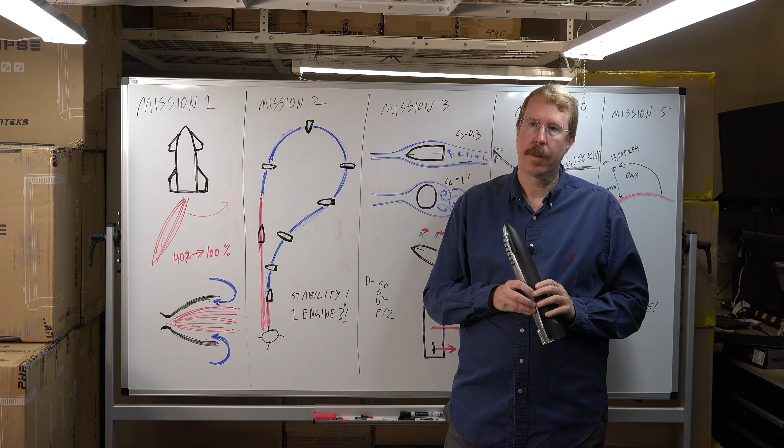So what you're proposing is Elon is going to come up with the first step to Alpha Centauri, but it's going to require another person after him, most likely, to take step number 2. And that might even involve another little lily pad that you leap to.

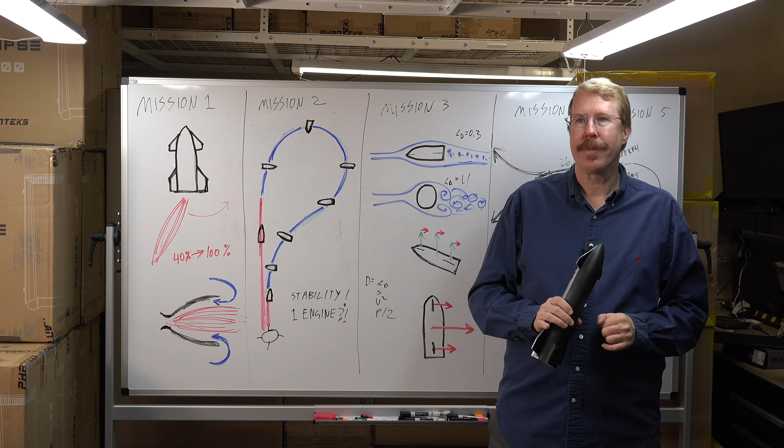It may turn out that there's a really good way to launch from the moons of Jupiter or Saturn, or the rings of Saturn. So basically, getting to Alpha Centauri from Earth is like a little tadpole—the frog trying to hop across the pond, and it's the first little lily pad. But every lily pad you get to makes it easier to get to the next one. So I view this as the first stepping stone to going to another star.

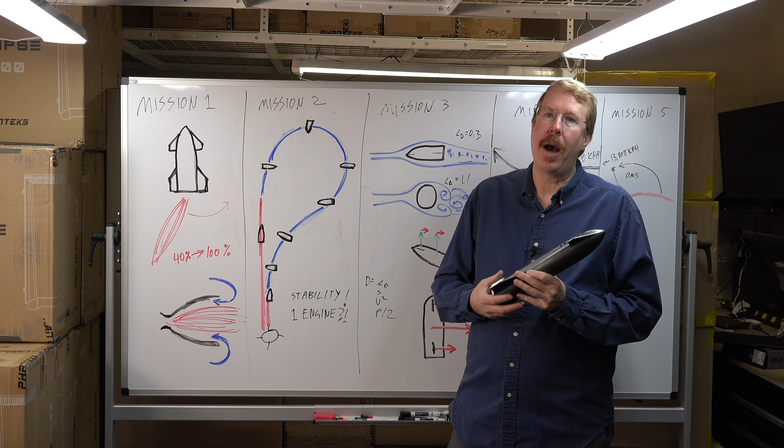I don't see that last stepping stone happening in our lifetimes, but we can take the step to Mars in our lifetimes. And that's why I'm excited to see this mission succeed.